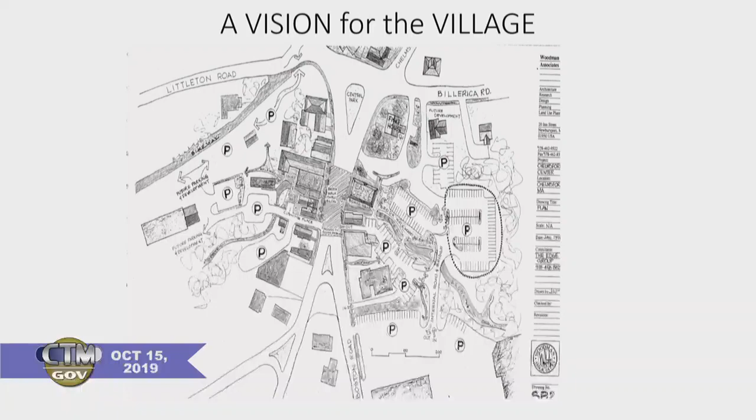As Paul mentioned, I just want to provide a brief, high-level overview as to what the town has been up to, dating back approximately 20 years ago. The slide in front of you is an image from 1998. That is the first master planning image from a dedicated committee for the village. What's interesting to note is it primarily highlighted the Brookwalk vision, but if you look closely, it also identifies future development opportunities not in a narrative format, but in a drawing format.

From 2011 to 2013, the town commenced planning and zoning efforts, essentially to implement the recommendations of the 2010 master plan. Many members in the audience were heavily involved in those efforts, particularly the 2010 master plan and the 2013 Center Village master plan. I want to give credit to those former and past members.

From about 2016 to present is essentially a period of implementation, highlighted by the Grist Mill approval in 2016. Town meeting appropriated additional funds for wayfinding implementation. We've received a MassWorks grant leveraging private investment in the center to continue the brick sidewalks and streetscape improvements. And most recently, in 2018, we received a state earmark for $200,000 to fabricate wayfinding signage and furniture.

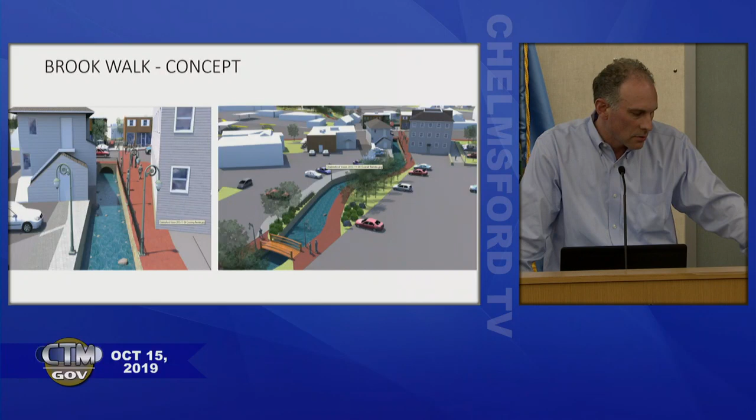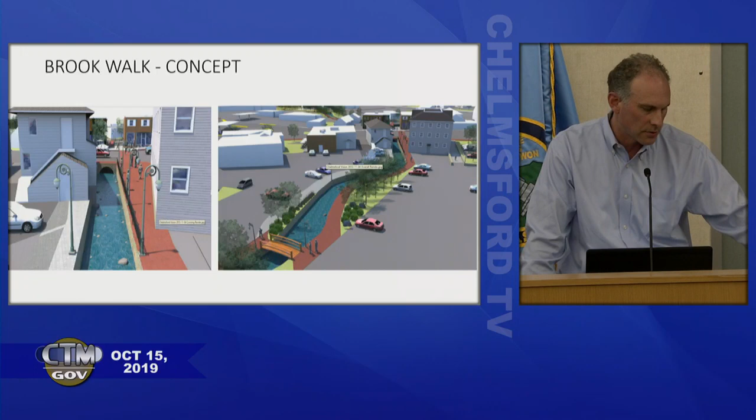The next image shows some potential visions related to the brook walk concept, located within the hardscaped area. These are intended to be used for imagination, planning, and visioning purposes—kind of what-if scenarios for what could potentially be built there for purposes of a brook walk. This is within the existing hardscape area, primarily along the Santander rear parking area.

More recently, as I mentioned, the 32 units at Grist Mill are currently under construction. We understand that most, if not all, have been sold, and initial occupancy is commencing within the next month or so. As part of that project, they will be implementing the brook walk portion of the brook walk.

I also mentioned the MassWorks grant that will be commencing construction in the spring construction season of 2020. As part of that project, the town has on the books continuation of the brick sidewalks from Cushing Place around the corner up to the Bruce Freeman Rail Trail. That's the last piece where brick sidewalks have not been installed.

As part of that streetscape improvement, we envision the wayfinding signage and street furniture also being installed. In order to implement the Brook Walk vision, at next week's Fall Town Meeting, a $60,000 request for a Phase 1 Brook Walk feasibility study will be voted on. That will be an opportunity for the town to appoint a dedicated committee working with a variety of stakeholders, including the Land Trust, the Conservation Commission, members of the Center Village Master Planning Committee, and several at-large members, one of which may be a resident of the grist mill.

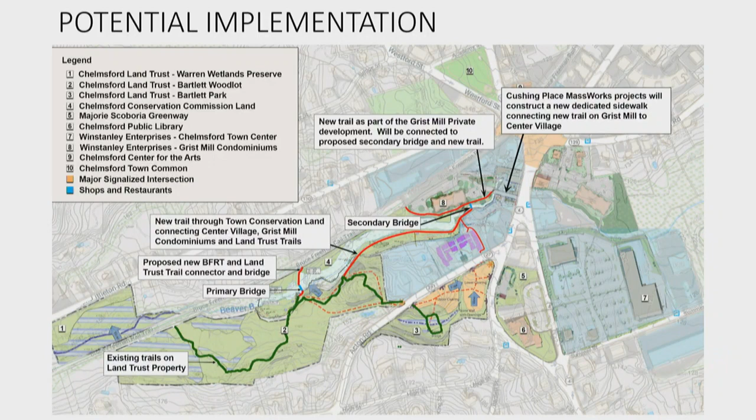So the final slide is just to summarize at a very high level. Over the last 20 years of continued commitment by the town, effective zoning overlays adopted by town meeting, and the fortunate circumstances of having a good market, has led to the opportunity to create a vision which could include a three-legged stool for multifamily residential development along with the implementation of the Brook Walk vision. That was the high-level context to provide some background for this meeting.

At this point, I'd like to hand it over to the development team, who can speak in more detail about their proposal.

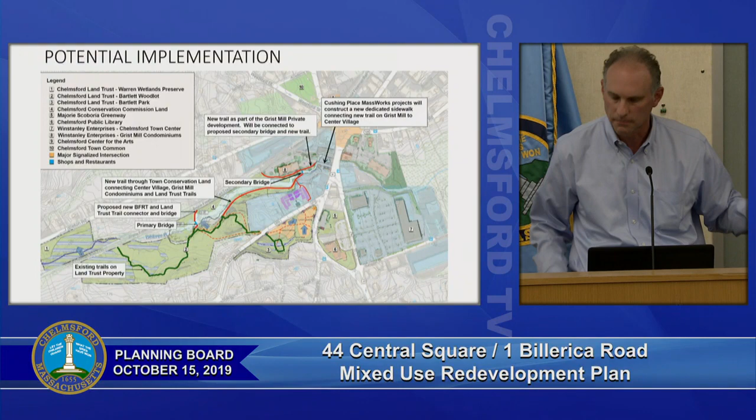Good evening, everyone. My name is Katie Enright, and I'm a civil engineer with Howard Stein Hudson. My office is here in Chelmsford on Turnpike Road. I'm here tonight with a presentation that's a culmination of the last 4 years, so I'm going to try not to be too wordy as I discuss the project, because this is a new project before you tonight.

Just a brief history. The project, as Evan and Paul stated, is well known as the Oddfellows and Fiske property. Santander has also been there, and there's also a large parking lot at the back. The property is known as 1 Billerica Road and 41 through 44 Central Square, and is about 3.5 acres. You see the three properties on both Billerica Road and Central Square, but the property does go back fairly significantly.

Since the year 2000, the project or the property has been owned by a company out of California. I know a lot of people have heard that and have questioned why it's been left in limbo for the last 20 years. Ben Swanson is here tonight from AmeriCal if you have any questions regarding that.

AmeriCal Property Management has leased the property to several different banks over the last 20 years, and the banks actually controlled the entire property within their leasehold. Not only did they lease for the purpose of having the bank, but they actually had the right to do things within both Oddfellows and Fiske and the parking lot. So the entire property was held by the bank.

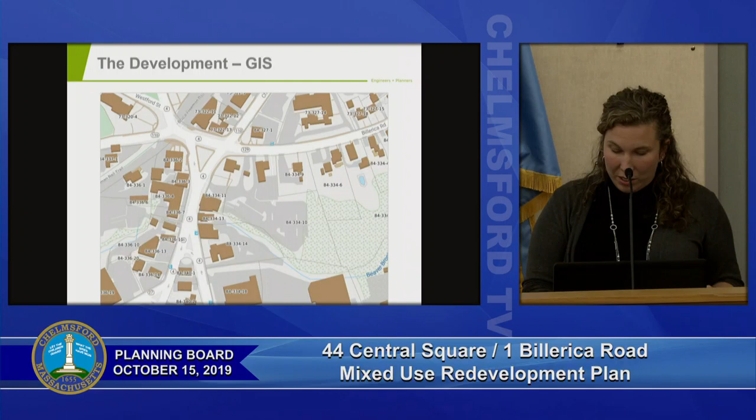So you can see the development site, or the site itself, is quite large. It's certainly more than the 3 buildings you see at the front.

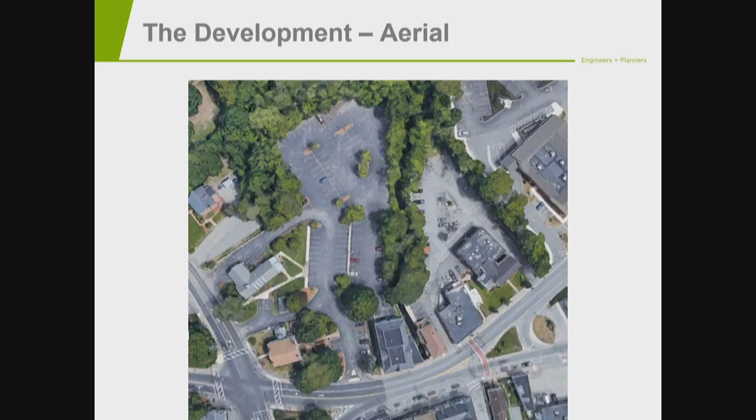Again, this is the aerial image, so you can see Fishbones, and you can see the Fishbones parking lot here. This is the large parking area here—Santander, Fiske, and Oddfellows—and this is right at the entrance to Cushing right here. So you can see the development parcel goes all the way back. This is the parking lot, this is CVS, and the parking lot next to CVS. So it goes significantly far off the roads in both directions.

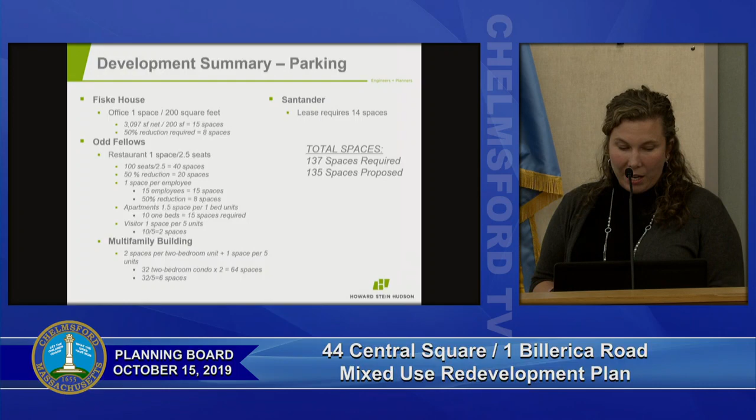So where are we going to park these people is the next development summary, and it basically talks about the zoning analysis based on the amount of office space, the amount of restaurant, the amount of retail, and the amount of multifamily that we're proposing within this site.

The Fiske House we're looking at as being a pure office space, so we're looking at that for a number of spaces. Oddfellows, we're looking at doing a 100-seat restaurant on the first floor and 8 to 10 residential units on the second and third floors above that.

And the multifamily building at the back is 32 two-bedroom units, so that would require also an additional amount of spaces. Then the Santander lease itself requires 14 spaces, which is more than would be required by zoning, but that's what they require to operate moving forward. So you can see we're just about in the range of where we're supposed to be—we're actually just 2 under at this point with proposed parking within that lot.

Oddfellows certainly has a long history. I've read the account on the Historical Commission and District Commission's website. It's had many, many uses. Certainly, Ali and Human have looked at the past uses, and I think you'll find that typically you're seeing a business on the first floor. Certainly, the second floor was Oddfellows Hall at one point and could handle up to 300 people in that building, but was then eventually turned over to apartments and was the Colonial Apartment. So they're looking at creating that again, that first floor commercial usage, and that second and third floor apartment usage.

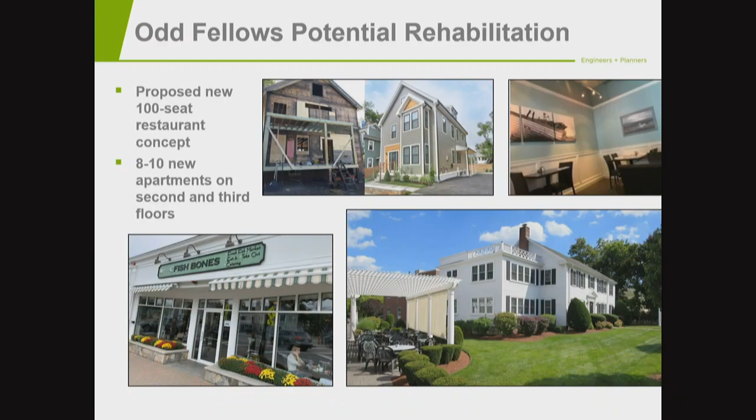Good evening. My name is Ali Zosharafatan, I own and operate Fishbones Restaurant, and my partner in this venture is Human Bayani of Belmont, Massachusetts. We actually went to high school together in Boston. Mr. Bayani owns a real estate company, and he has rehabilitated a number of single multifamilies in Greater Boston and Cape Cod areas. I believe there's some pictures up there of his work.

In addition to Fishbones Restaurant, I own the historic building at 6 Boston Road in Central Square. It's fully tenanted, and we have 11 professional businesses in there. And we are very excited, hopefully we can save Oddfellows building and kind of bring it back to its glorious days. So that's pretty much what I have. Thank you.

Certainly, the project team has been through Oddfellows. Just to comment on some of the things that we've seen to date, certainly there's been significant water damage in the building. There's mold, there's settlement. But we have a really good team of professionals looking at it. And as I said, the intent is to really try to save that building and make it come to life again.

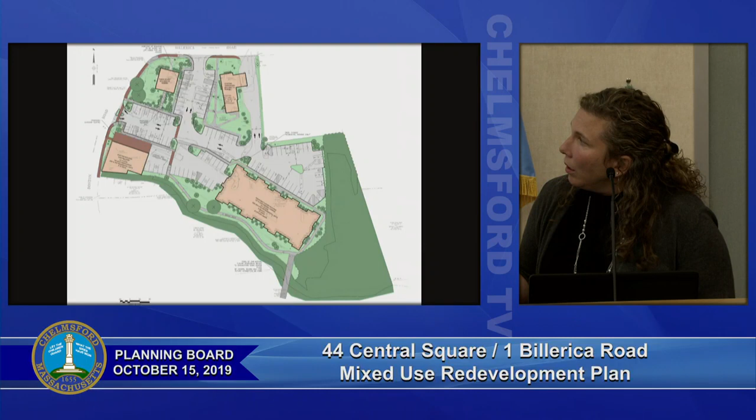And again, we're working through this process, really starting today. Back to the site plan, you can see the parking lot itself has been completely re-looked at and reformed.

The existing edge of pavement actually goes a little bit closer to the brook than some of the things we have located here, but what we used was the existing pavement and the existing building structures that are there to kind of enclose the development. So the building is set all the way at the back.

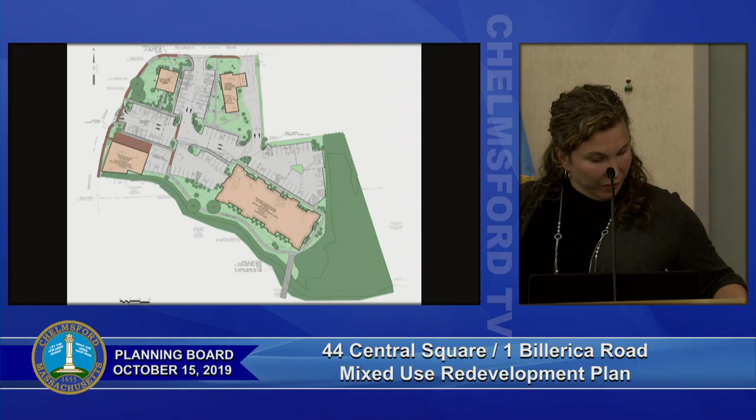We're more than 250 feet from Central Square, and we're about 225 feet from Billerica Road, and you can see the sight line here is extremely limited. This is where all the trees are, behind the professional office building on Billerica Road.

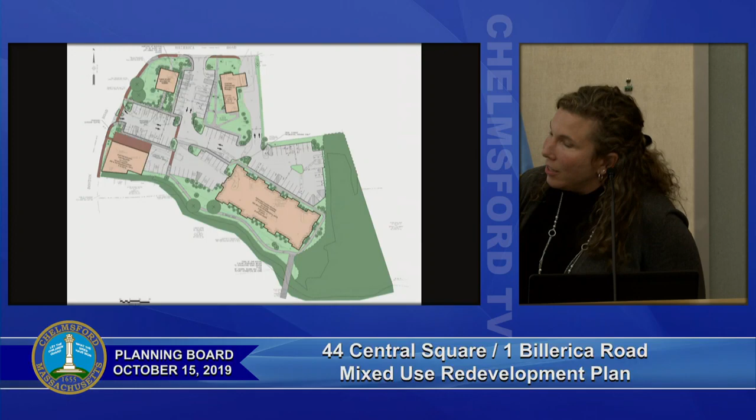So really, the only place you're going to get to see that sight line is if you're all the way at the very back parking space next in the Fishbones parking lot - will you get to see the side of this building. You'll capture it very briefly if you turn your head right as you go through Central Square.

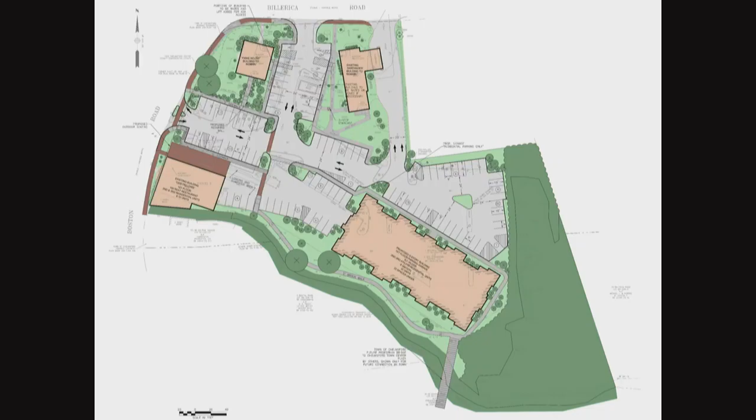And again, all of the parking for this building is contained under the building, and then in front of the building here, the restaurant parking is contained, and the apartment parking is contained in this area. The Santander parking is contained right around Santander, and we've created new parking along this entrance drive along the Fiske House to allow for closer proximity parking to the Fiske House.

That is our presentation for tonight. As I said, this is a conceptual plan. We have a lot of work to do. We asked for this meeting because we didn't want to hit one board first and start the process. We wanted all of you to see it at once, so that the information that's given to all of you is at the same time.

Certainly we'll be making appointments with each and every one of you as we move forward with this from now until, I believe, my project timeline goes through the end of next June. And essentially, construction couldn't start out here until July 1 of next year anyway.

So certainly we're here tonight. Eric Cates is here from Stonegate Construction. Ali is here, who you heard from. Ben is here from AmeriCal. Fred Faust has been working with us since day one on this project also, and would be happy to answer any initial questions that you might have.

Katie, David McLaughlin. I have 3 questions. In the last 35 years, at one time, there was a $5 million state grant for Central Square. I didn't see that on your list. Is that gone, or is that still available?

So that was an earmark from a couple years ago. It has never been appropriated by the governor's office. Quite frankly, I'm not sure there was any justifiable reason for the governor to authorize any of that money. However, what we are contemplating is that if the town does have a compelling reason to reach out to the governor's office associated with the implementation of the Center Village vision, then we will do so.

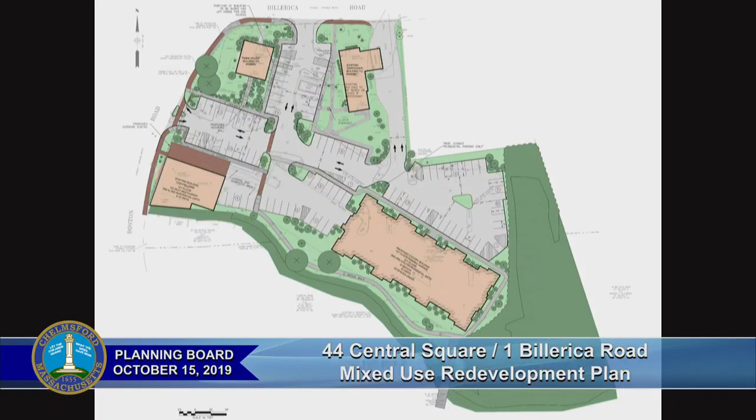So as you're pondering questions, anything on Katie's presentation or my presentation, questions, comments, we're happy to take any of those.

I take it that the dark green is floodplain? The dark green are the existing trees to remain — that's the tree line that's there today. The floodplain runs basically here and then nips a little bit of this area. So part of the building will be in floodplain? Correct — the garage will.

So as people continue to ponder questions, I'll speak a little bit about the process moving forward. As Katie mentioned, the team has already commenced engagement with the Historic District Commission. Katie also mentioned there'll be many meetings over the next 8 to 10 months, some of which will likely be part of formal public hearings.

Depending on how the 4 regulatory boards and the development team wish to proceed, we may convene a similar multi-board meeting such as this to open that official public hearing — we'll have to figure this one out. As Katie mentioned, this is much more complicated than a similar multi-board meeting we did several years ago related to the Lowell General Hospital up in Drum Hill. So we'll have to figure that out as we go.

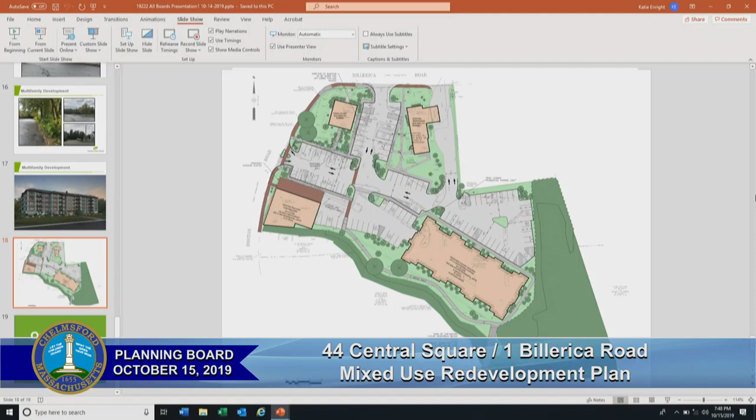All right, no further questions, comments? Okay, so at this point my expectation will be that the developer will continue to engage with the district commission, and then at some point, hopefully sooner than later, engage with the planning board, which would likely be the next board up.

Yeah, certainly the next - where this is in the Center Village Overlay District, this project would require us to work through that process. We will need to come before the planning board for an applicability review. The plans themselves would be developed slightly further, but before going into too much engineering and design, we would come before the planning board and make sure they supported the notion of this project before jumping into the next phase of design.

So again, we are looking forward to going back before the Historic District Commission, and most likely we'll be making application to the planning board for applicability before moving forward with design plans.